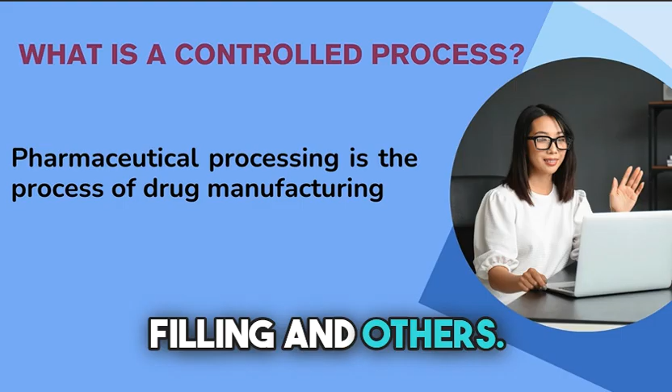The process validation consists of some main stages, which we will discuss together in the following sections. The three stages of process validation are: 1. Process design. The commercial process is defined during this stage based on knowledge gained through process development activities. 2. Process qualification. During this stage, the process design is confirmed as being capable of reproducible commercial manufacturing, including qualification of the facility, utilities and equipment.

3. Continued process verification, maintenance, continuous verification, and process improvement. Ongoing assurance that the routine production process remains in a state of control, assessed by collecting and monitoring information during commercialization. In your opinion, what steps should be taken to design a process? And what should be the order of these steps? Well, continue watching the video to find the answer to this question.

We have reached the point where we need to consider what issues we should keep in mind for a proper understanding and design of a process. First of all, we must understand the process in order to design it. What does understanding the process mean? It means that we need to first identify the important stages in this process and determine which of these stages are key. Additionally, we must know the product and understand its nature.

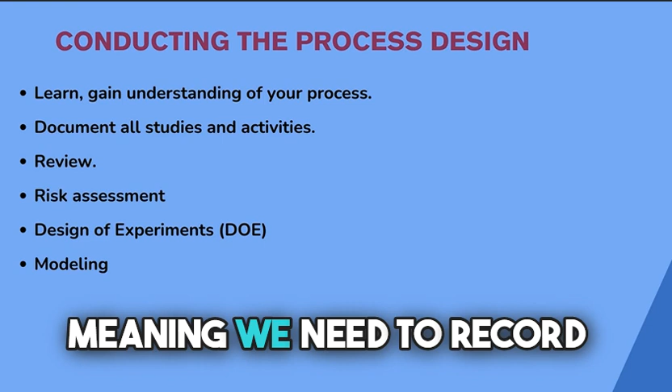To design a process, we can take various steps. First, we need to understand the process and know exactly what it is supposed to do, meaning what material it is converting into another material. Next, we should document all activities, meaning we need to record everything we have done and have it in written form. In the next stage, we should conduct a review of our writings and understand how the process operates.

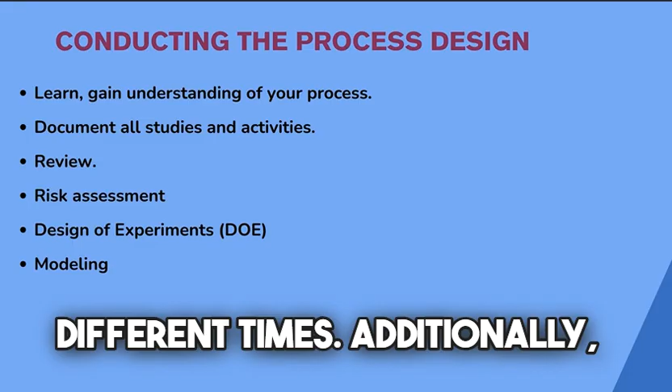To improve the functioning of the process, we need to have a risk assessment, which means identifying the key factors that affect our process and understanding how each one impacts specific items at different times. Additionally, we can use tools like modeling and experimental design to predict the behaviors of a parameter or a process. After designing a process, we need to perform a process qualification. In your opinion, what actions should be taken for process qualification? The next slide contains the answer to this question.

For the process qualification, the qualification equipment must be assessed, and the facility must also be evaluated, meaning its design and quality assurance must be examined. Additionally, the performance of the system itself must be verified, ensuring that the system operates effectively and correctly. The qualification process should be based on current good manufacturing practice.

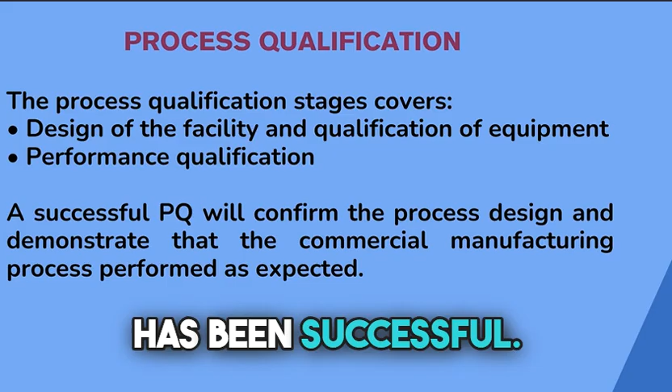Once the qualification is completed, which is referred to as PQ or performance qualification in the pharmaceutical industry, the production of the pharmaceutical product is guaranteed. We ensure that the quality of our pharmaceutical product meets a specified standard, which indicates that the design has been successful. In the final stage of process qualification, we need to ensure that the design process is qualified and will certainly remain effective forever. For this purpose, a continuous process verification procedure must be carried out.

What details do you think should be considered? If you have any points, you can share them with us in the comments. However, if you don't know the answer to this question, you can look at the next slide.

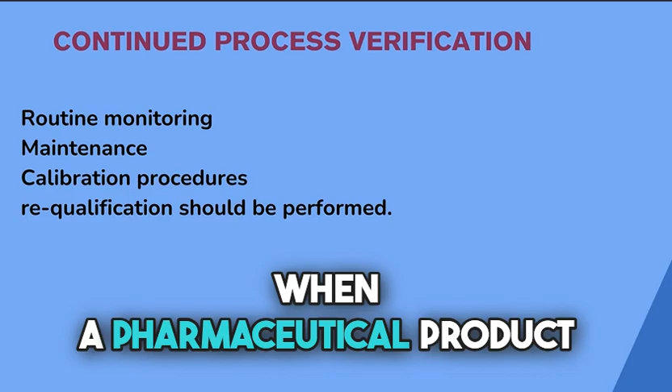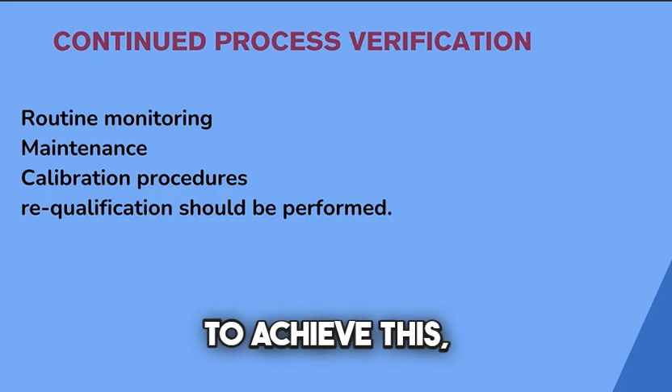As I mentioned before, the goal of continuous process verification is to ensure that our processes are consistently controlled. When a pharmaceutical product is produced commercially, we need to ensure that the product quality is maintained and that there are no microbiological issues related to our equipment for pharmaceutical products. To achieve this, we must evaluate the quality of the equipment. Several methods are used for this purpose.

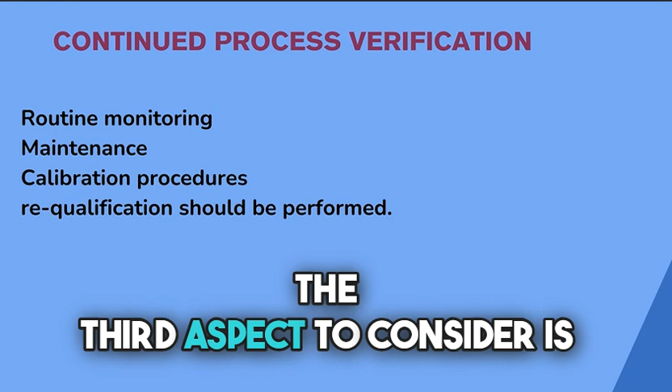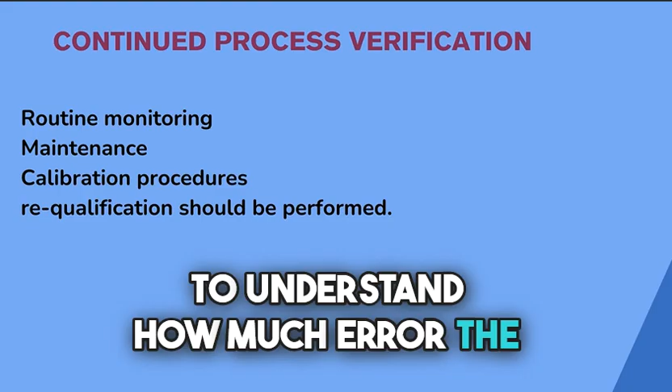1. Routine monitoring, which means that the quality indicators of the equipment should be checked daily and recorded in specific logbooks. 2. Maintenance and repair of equipment must always be carried out in the most serious manner possible to ensure that our equipment is functioning correctly, which is referred to as qualification. 3. The third aspect to consider is our equipment and processes. The equipment must be calibrated regularly, and the acceptable error ranges should be evaluated to understand how much error the equipment has and whether this error affects the quality of our product.